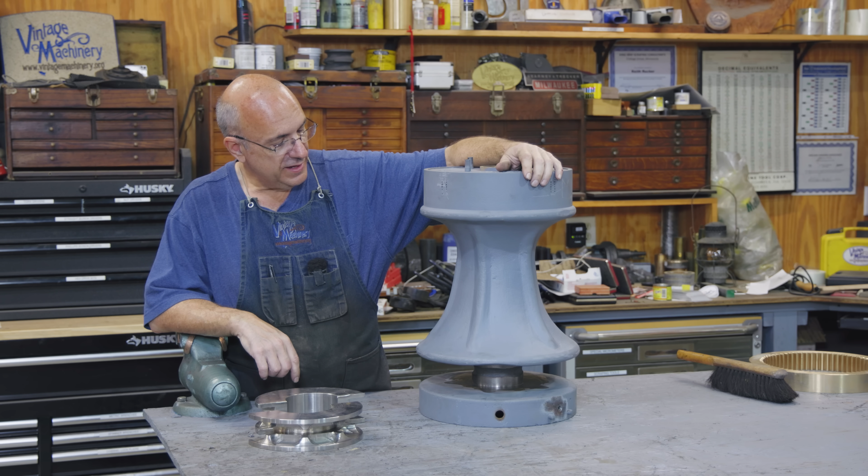Guys, today we're back to working on the Tally-Ho Capstan project, and we're going to be changing gears a little bit and starting to work on this windlass drum here. And particularly today, what I want to focus on is getting the chain Gypsy mounted in here. Now, if you haven't followed along with this project so far, this original windlass here is over 100 years old. Came off the Tally-Ho sailing ship that's being restored up in the Pacific Northwest right now. And this is the original capstan that was on the boat.

However, the chain Gypsy down here in the bottom, this chain Gypsy is basically the part that grabs the anchor chain and pulls it up out of the water. This drum will rotate and it will wrap around here. The original chain Gypsy, or the little sockets that the chain fits into, was cast into the base of this. It was extremely worn, as you would expect on a piece that was over 100 years old. And to make matters even worse, the pattern for the chain that was in here is not a chain size that you can even source anymore. So it really didn't fit any modern chain.

So we made the decision, working with an engineering firm up in the UK, to basically machine out the original Gypsy in here, and we're going to be installing a new Gypsy. Now, David Webster of Deep Blue Engineering, who's kind of done the engineering work on this, he's actually already designed the new Gypsy pieces. He's already machined these out of some stainless steel, and he's sent these over to me. And my job is, we got this machined out previously, and we're going to be mounting this today and getting it ready to put back together so that it can be used the way it needs to be used going forward.

So let's bring you in here, kind of show you the components, show you the game plan, and we're going to get started and get this job hopefully knocked out in this video, getting this chain Gypsy mounted back in here. So these are the new pieces here that were machined, and you can see the sockets cut in here for the chain. This was obviously done on a CNC system where you got the flat and then you got the groove in the back that the chain will lie in, the links in between them. And again, this is what we're going to be installing in here into this slot. And we had opened this up previously, machined out all that old area in there.

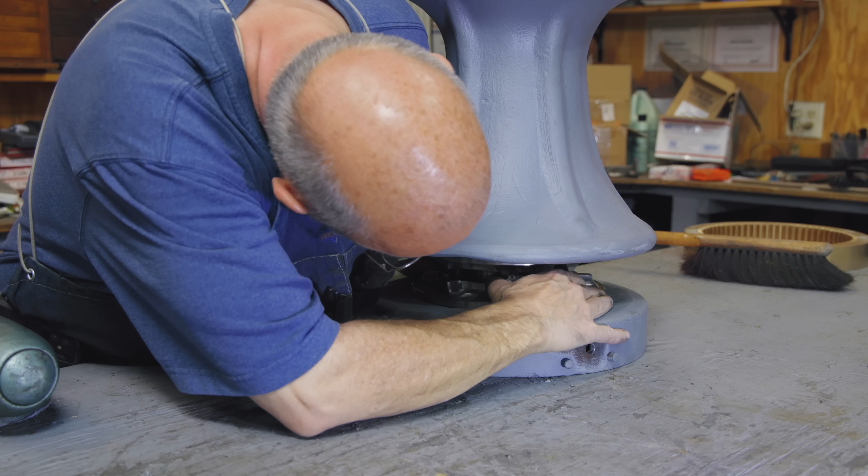And these basically are just going to slide up in here. Let's see, I gotta get them in here. They fit. Just gotta get them in just right. There we go. So those two halves come together in here, and these just sandwich right in place. They come together very nicely in a seam here that you can see right here, and I have to get them pulled up tight, but that seam will close. I had them closed up earlier.

I don't want to do it right now because it's got to come back out, but this will squeeze all together. And we're going to be putting some bolts up through here, basically bolting this thing into place. And it'll also have some bedding compound stuff put in here as well when we assemble it for good, so that we have a nice tight fit.

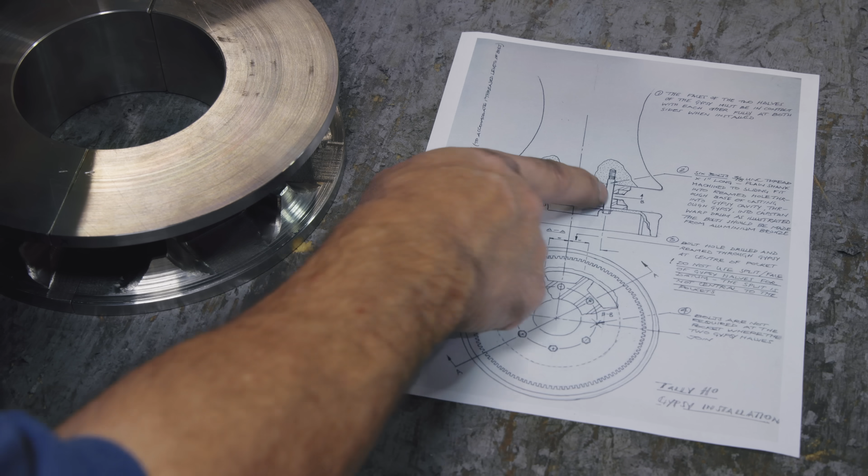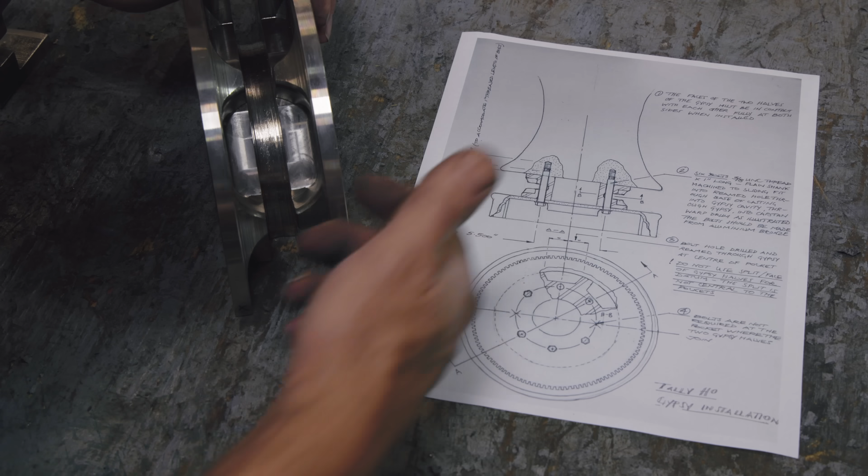So let's take a look at the drawing that Dave sent me. And you can kind of see we've got the capstan here, and here's the Gypsy halves that will be going into the capstan. We'll be running some bolts up through this. Basically, he wants to use 6 bolts. 1, 2, 3. We won't put bolts on the split line, so there'll be 3 bolts equally spaced, and those spacings are also going to be done so that basically the bolt will pass kind of right behind where this chain is going to be laying flat.

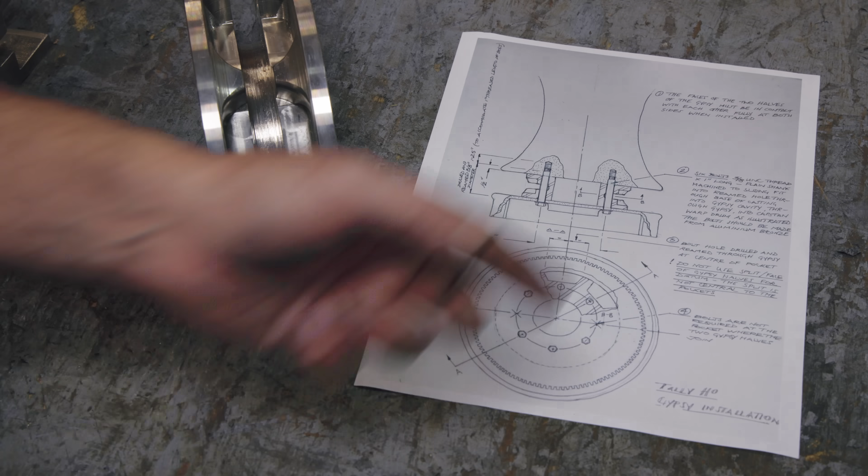So right in here, you got the chain, you got a cross section, but there's an area right in here where there's nothing in there for that chain to hit because it'll be laying flat here, and you'll have the 2 links on either side. So the bolt will be kind of coming right down through that area, and we'll just have those right in place. So these are going to be 3/8 bolts. We're probably going to have to make these bolts out of some aluminum bronze. That's the material he wants to use. Won't be corrosive. And we'll have to figure up the length and all that once we get these things drilled and tapped. So anyway, that's kind of the game plan. That's what we're going after.

I think my game plan is we're going to assemble the gypsy halves back over into the capstan, and then we're going to take this over to the radial drill and actually drill the holes in here. I'll have to get them lined up where they need to be. We'll drill the holes, and then we'll probably pull the halves back out.

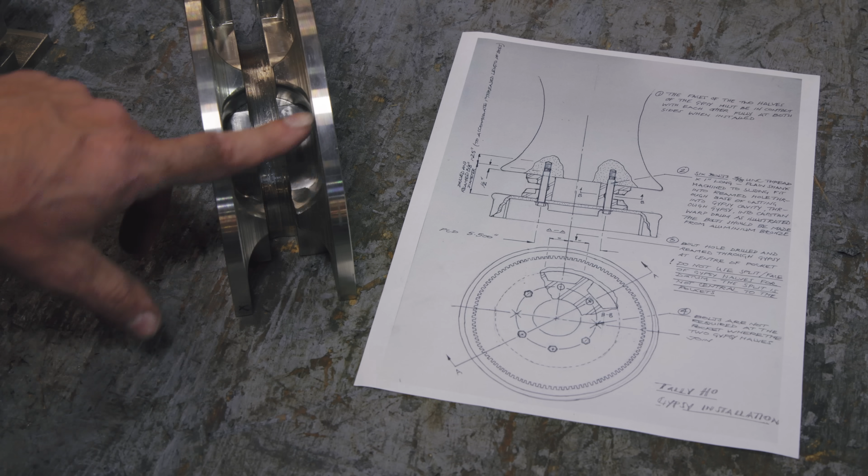We'll tap the holes. Since we'll be drilling for a tap size, then we'll have to drill these oversized to the 3/8 inch size, drill and ream those. For the bolt to go down through, we'll have to tap the holes in the bottom of the capstan, make the bolts, and put it all together. So yeah, a lot of work, but we'll get it done.

So I've got the capstan drum over here on the radial drill where we're going to be drilling the holes that are going to be going through the actual casting here, as well as through the gypsy piece that's going to fit up in here. And I need to get this set up for the diameter that I need to drill. Now, I'm not going to be able to do like on a milling machine and dial this thing in, find a center, and lay out a perfect hole pattern.

I do know what my diameter needs to be, and we're just going to be kind of getting those bolts more or less in the center where they need to be on each one of them, but they're probably not going to be laid out perfectly. It's going to be all right though. We just need to have the holes for alignment.

Now, to set up my hole pattern, I need to have the radius marked in here for me to work off of. So what I've done is back when we turned this, I had to make a little piece that fit into the bearing. It's just got a center in it that we used over on the lathe to support this. I've just dropped that back down in here, but what I got now is a center that I can work off of, and we can scribe a circle in here for us to be able to lay out our hole pattern.

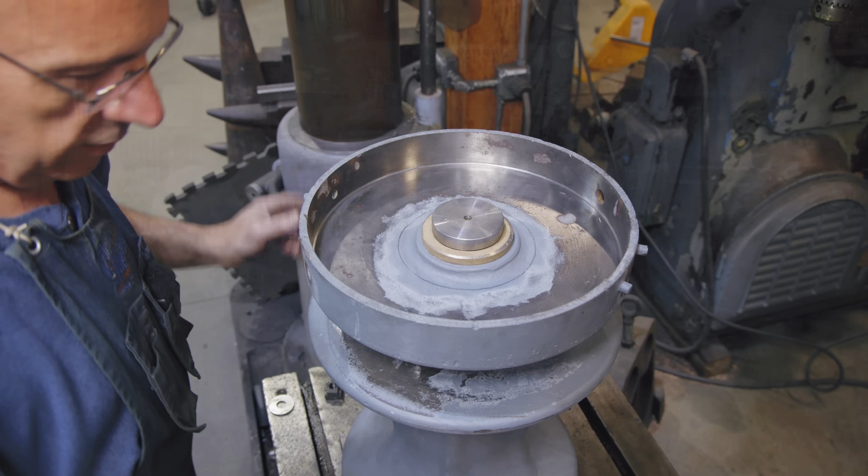So I've got my hole in here. According to the plans, it's a 5.5 inch diameter circle. So I basically just took a set of trammel points here. One of them I can mount a pencil in, and I just dropped this down into that center, and I went around and scribed a circle all the way around. That is my circle, where we'll have everything in that circle.

Now what I need to do is get the gypsy piece put back in here and determine where each of the individual holes need to be. And we'll start drilling this thing out. But before we do that, I need to get this whole thing bolted down to the table. Now I've got a long rod that I'm just going to drop down the center here. We'll come up with something to kind of clamp this thing straight down to the table so it doesn't move while we're doing all this. I get that set up, and we'll see if we can start drilling some holes here very soon.

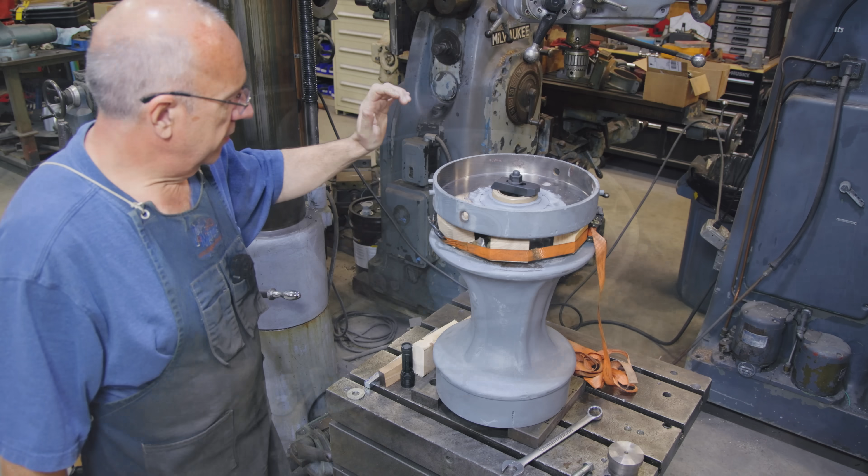So just showing my setup here, I think I got it ready to start drilling. So first off, we've got this whole capstan drum attached to the table. There's one single bolt that goes all the way down through here. I just used my clamp set, and we put together a bunch of these different studs, and it's just all sandwiching straight down. Now there's a couple of studs sticking out of the bottom of the capstan here, or it's actually the top, it's turned upside down, but still it wouldn't allow me to go flat down the table. So I do have a couple of blocks of metal down here that's just kind of holding it up. It's all nice and flat and even.

And then on the gypsy piece inside, I wanted to make sure that was pulled together real tight. So I just put some blocks of wood around this and used a ratchet strap, and that's just holding it all nice and tight in there so that we can come in here and drill. Now, we'd already scribed our circle up here. I went back and lined up where the 6 holes need to be drilled. I have those marked in here. You'll see that in a minute. And now I think we're ready to go ahead and start drilling these. Let's go at it. Let's see if we can drill some holes.

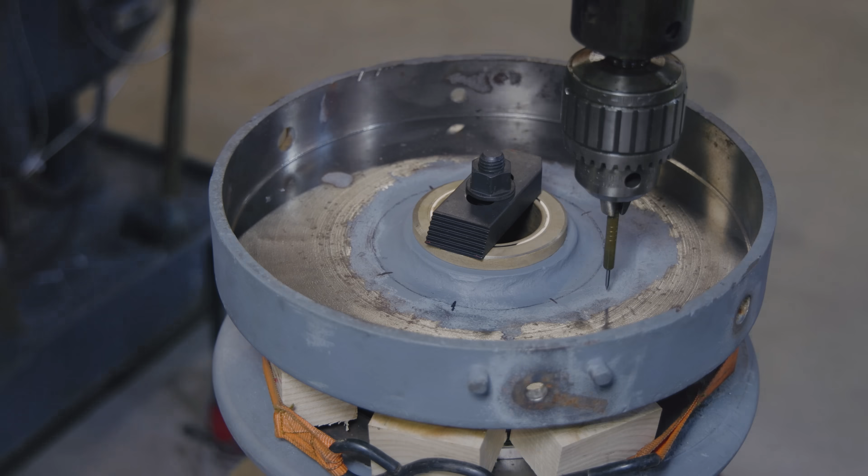All right, so first thing I need to do here is we need to get lined up on our holes to drill. So with this radial drill, I can kind of move the head around, swing it around, move it in and out. And I've just got a little pointer on here, and I'm basically just trying to get lined up over that mark. And guys, this doesn't have to be just perfect.

We're going to drill these holes, get them as close to that hole pattern as we can. But if it's off by just a tiny bit one way or the other, it's not going to matter. We're going to be putting this back together so the holes will line up when we come back together. We're going to have them awful close. So that one is where it needs to be.

So I'm going to go ahead and just take my little pointer out. We're going to start with a spotting drill, and we will just spot that hole to get a little hole started right where it needs to be. We're running on a rough cast surface here, so it's not a perfectly flat surface to start on. We will just get us a little hole started. All right, that should be good.

Now we're going to be using 3/8 inch bolts. We're going to be making some bronze bolts to go down through here. So it's going to be threaded 3/8 down in the bottom of the hole. So I'm basically going to start by just drilling a hole all the way through here for a tap size for 3/8-16.

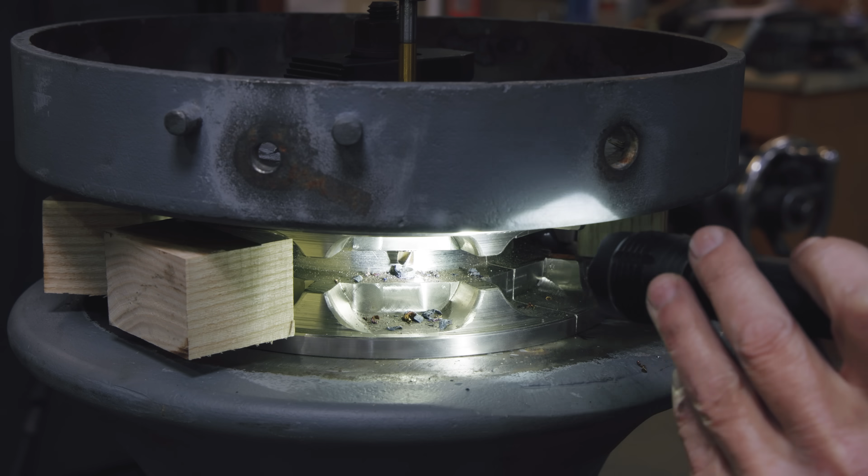So it looks like, guys, what happened is when that drill bit came through that little open area there, a little slug got down up underneath it, and that little slug just turned red hot. It was between there and the metal. I'm going to see if I can take a punch and just kind of punch that out and see if we continue drilling. The drill bit doesn't look that bad, but that was just in the way. Sorry, I turned the light off there.

This little slug here was what was in between the drill bit and the bottom that we were drilling into. That got red hot. Hopefully we haven't messed up too bad here. I think I'm going to take that drill bit back to my drill bit sharpener and make sure we got a good edge on it, and then we're going to come back and see if we can drill that the rest of the way through.

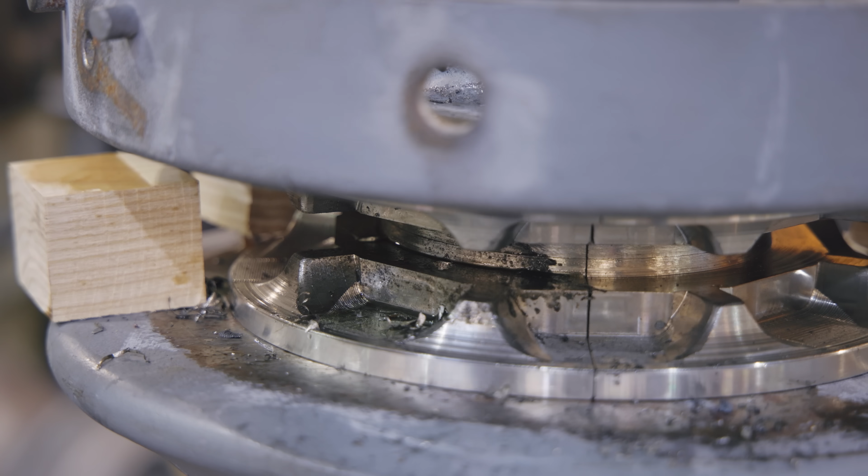Hi guys, I took that drill bit and sharpened it up, and I've been working on this a little bit. I've been putting a little oil in there, and I'm just kind of putting the power feed on and letting it drill a little bit. Then I'm pulling it out of the cut, trying to keep it from getting too hot again. So far, we seem like we're getting down on there.

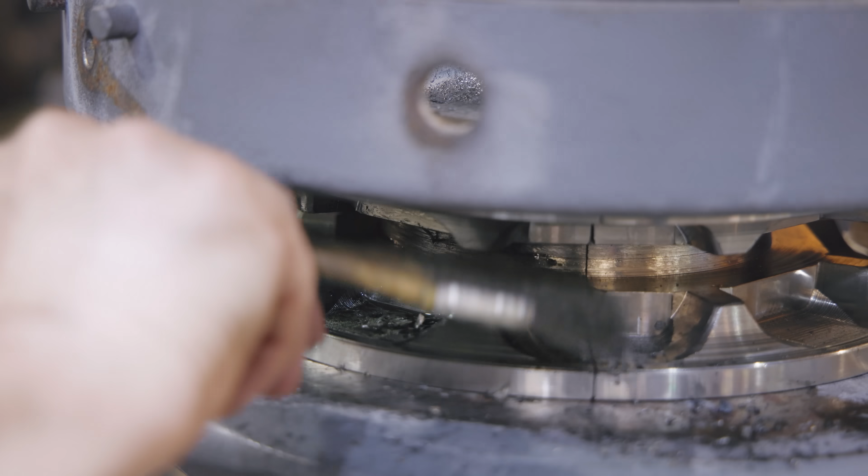Taking a second for this drill. Here it goes. It's starting to drill now, and it's pulling chips out. But you can tell this is really struggling. So I'm just kind of pecking it a little bit, clearing these chips, not giving it a chance to get too hot. It was a little bit of a bear to get past. We got some work hardening on there where it got hot, but I think we're getting through it. So we're just going to continue pecking on this.

I hope they're not all this much trouble. I know that stainless steel can be tough to work with, but this is getting kind of scary thinking it's going to give me this much trouble all the way through. Hopefully we get this first hole through here.

I'm going to try something a little different. I'm going to put some Anchor Lube in here. This is stuff I normally use for tapping, but I've always heard it's good as just a general cutting fluid, and I've also heard that it's really good on stainless steel. So heck, it ain't gonna hurt to try. We'll give it a shot and see how it does.

Yeah, we're into cast iron now, and we're all the way through. Good deal. All right. Wow. That was a tough hole. We got it. All right, let's figure out what I want to do before I go to the next one.

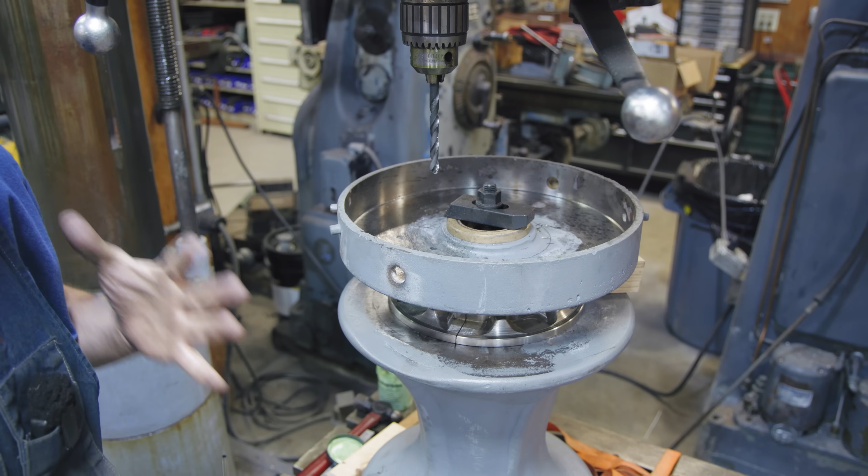But I do want to go ahead and enlarge the top part because I want to drop some bolts in these as I'm drilling them, just to make sure that nothing moves, just kind of pinning it in place as we go. So I'm going to go ahead and do that real quick. I just got a 3/8 inch drill bit in here, and tell you what, we'll just go ahead and put a little bit of this Anchorlube on here.

Shouldn't have any problem drilling through the cast iron on the top there, but once we get below that into the stainless, you see it's not drilling really nice right there. I really think that we work hardened the bottom of that. Hopefully we're not going to run into this kind of problem throughout the rest of this part. Clear out my chips, put a little bit more Anchorlube down in there since we are down in the stainless now.

All right, we're through the top part. I'm not going to go all the way through the bottom, but I do want to at least kind of get it started. All right. I think that's good for right now.

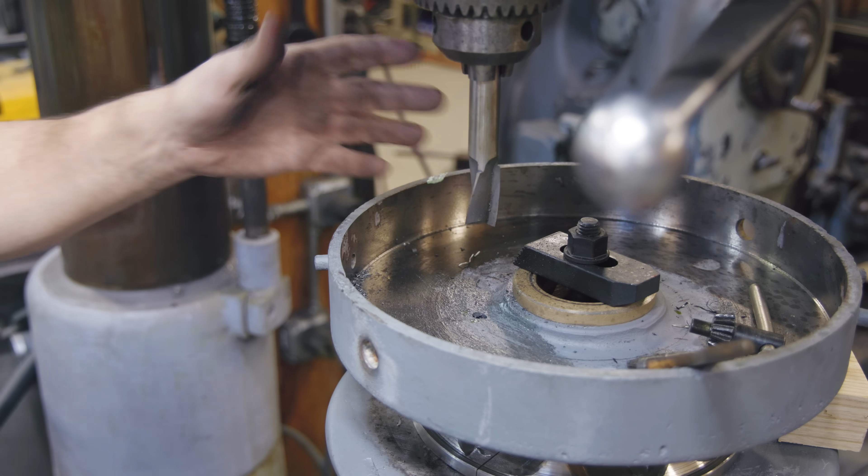All right, now I've got a counterbore in here. I don't have a pilot for this, but what I want to do is enlarge a flat. I want to basically just put a flat down here where the head of that bolt and washer is going to go. Right now I've got an uneven cast surface. I really want to have a flat surface, so I'm just trying to get an area that's flat where everything will go. And I'm hoping I can do this without having a pilot on this tool. If not, we'll have to make a pilot for it, but let's see how it goes.

We're just basically spot facing that area there until we get a nice flat surface all the way around. See what that looks like. It's probably good enough, but I see one little area it's not quite. That's probably good right there, yeah. All right, that just gives me a flat surface for that bolt to tighten down onto, and that washer should fit right down in that socket. All right.

And now what I want to do is I'm just going to take a bolt and I'm just going to let it just sit down in there. It's not tightened anything, but right now all this is doing is just serving as a pin. And as we drill the rest of these holes, that's going to just make sure my alignment hopefully stays exactly correct and nothing moves around on me.

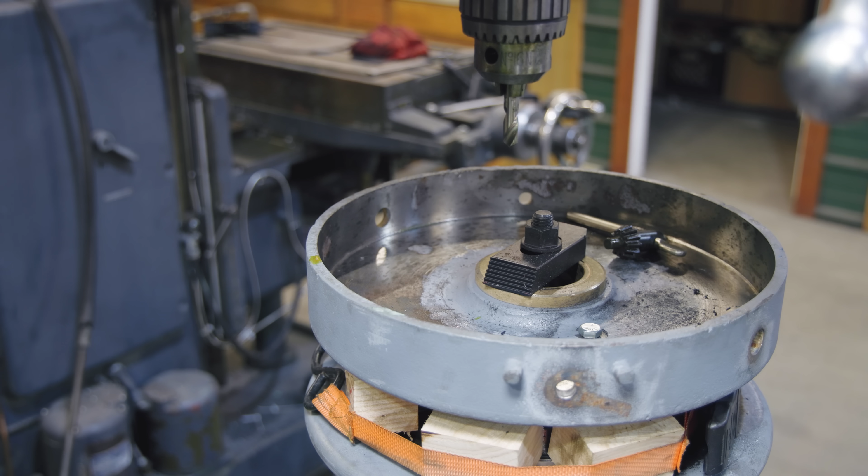All right, here we go with hole number 2. I should have it lined up right over my point again. We'll come in here with the center drill, or the spot drill rather, and we'll just spot a hole to get started on. We'll go to a 5/16 inch drill, again the tap size, and we'll drill through that cast iron piece first.

I'm going at a slower RPM, hopefully not building up as much heat this time as I did last time. According to my charts, I should have been able to run this bit, even in this material, at about 750 RPMs, but we got way too hot. So I'm hoping that by slowing this down, we're running at about 200 RPMs right now. Just taking our time a little bit more.

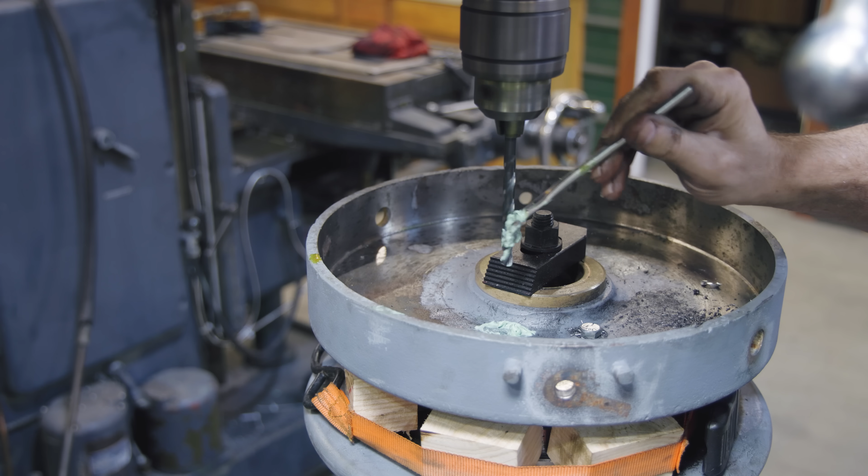All right, we are through the cast iron and into the stainless now. And I'm going to put a little dab of Anchorlube in here and see if that helps. I'm feeding by hand now rather than using the auto feed. And I'm just going to take my time. I'm going to kind of peck it a little bit, clear chips, and take my time going through this.

So far, this seems to be going a lot better, but last time the trouble started once we kind of went through that center section and started in the bottom half. We should be getting close to popping out. I think we just came through the hole. Yep. So we're through the center section now. Let's see if we have better luck down on the bottom half now.

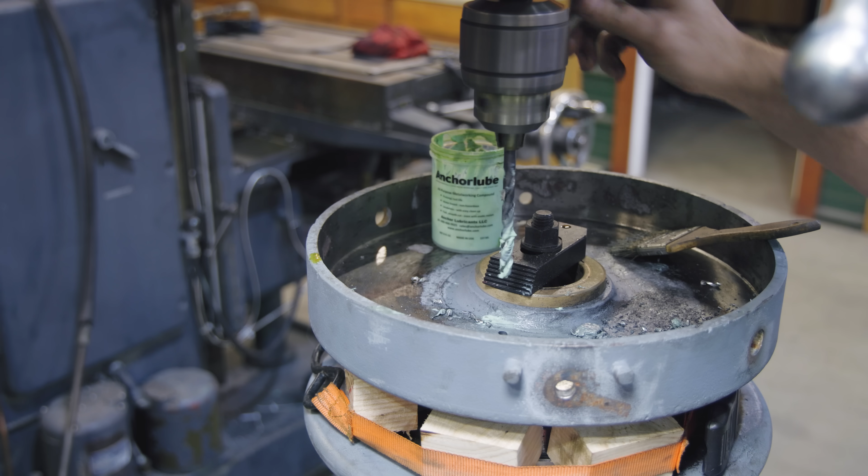Kind of feels like it may be in the cast iron now. I'm about gone as deep as I can go with this drill bit. I'm going to be bottoming out here. But I do have a longer drill bit we can put in there. All right, I'm going to swap out bits. All right, we are through, I think. Yep. All right, that was more like what I was expecting.

So now we're gonna go ahead and oversize drill this at least part way so we can get another bolt in there. We'll spot face the top, go around, do the other ones, and hopefully the other ones won't give us any more trouble.

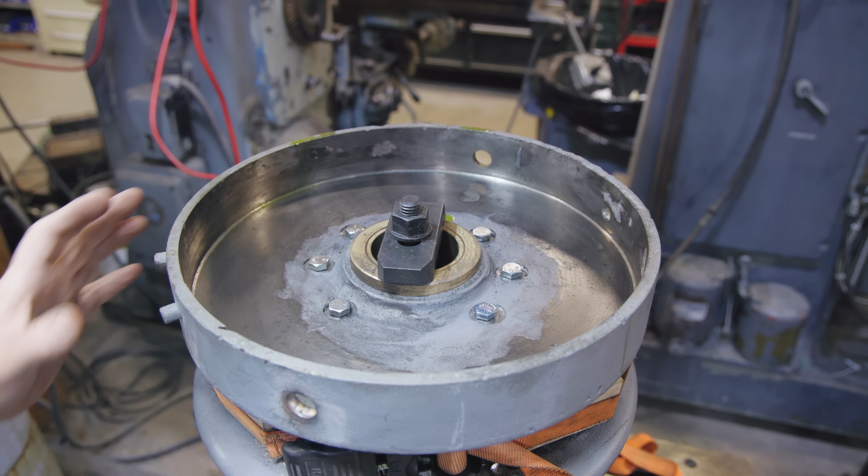Well, I got all my holes drilled. Everything went just fine on the rest of these. Just took my time and a little bit slower speed there on the drill, and we didn't have any more troubles. Did have to sharpen my bit a couple of times. That stainless steel was just really, really tough, but I really think that Anchorlube helped out a bunch, getting a little bit of lubrication in there as well. So we've got the whole pattern all drilled out.

I do want to go ahead now and take my straps off. And next, what I need to do is I need to actually take this thing completely back apart again. I need to finish drilling out the holes in the stainless parts all the way through, and we need to tap the holes in the bottom of the capstan for the screws to go into. But we got some other work that we need to do before we can put it all together. But we need to go ahead and see if we can get it all back apart.

So we'll start by pulling out these little bolts. Like I said, I just put these in just as pins, really, to kind of just hold it all in place as I was finishing up the drilling and stuff. That one wants to be stubborn.

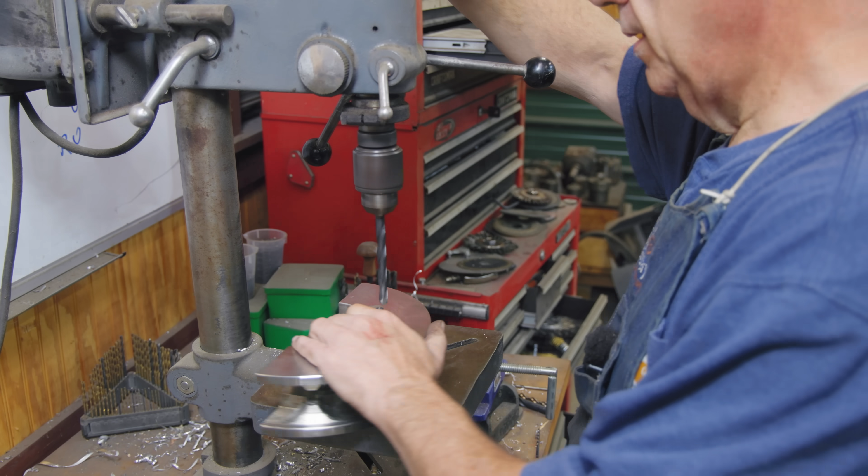Over at the drill press, and we're just going to finish drilling these holes out 3/8 all the way through. This will be for the bolt to pass all the way through the part. So we'll just go around to each one of these holes and finish it out. I've already drilled partially through with it, but we didn't go all the way through because I didn't want to get down into the area where the tap is going to be running below.

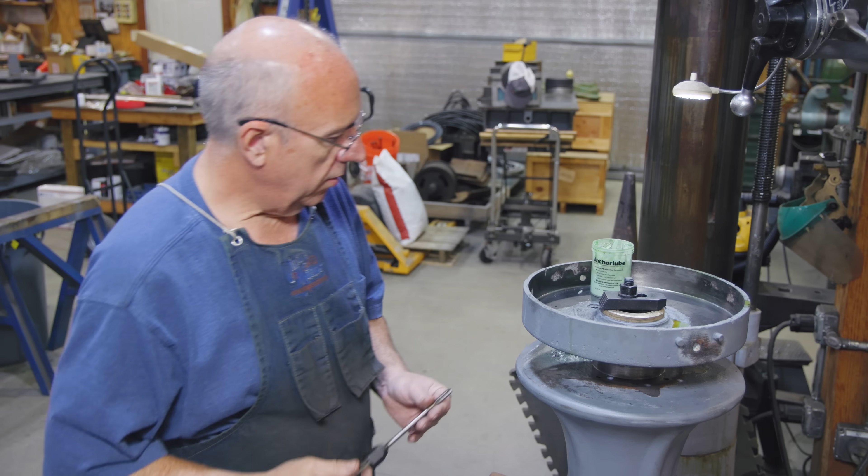Well, I think we're ready now to go ahead and tap the holes down here in the bottom. So the top has been drilled out to 3/8, but we've got the tap size down at the bottom. And I'm using a pulley tap. This is called a pulley tap because it's a long tap. It was often used on pulleys where they needed to go through the outside rim of the pulley down to the hub. So it's basically just an extended tap, and we should be able to kind of reach down in that hole. So I'll put a little dab of that Anchorlube on here.

Even though that is 3/8, I'm going to have to kind of thread it through the top. We're going to go back and ream these holes once we do the final assembly to make sure everything lines up just right. But I'm going to have to kind of get it through there and down into the, it's not really barely even cutting, but we are going to have to kind of screw it down through that top section. And once we do, we'll get down into the bottom. This should drop down here in just a second.

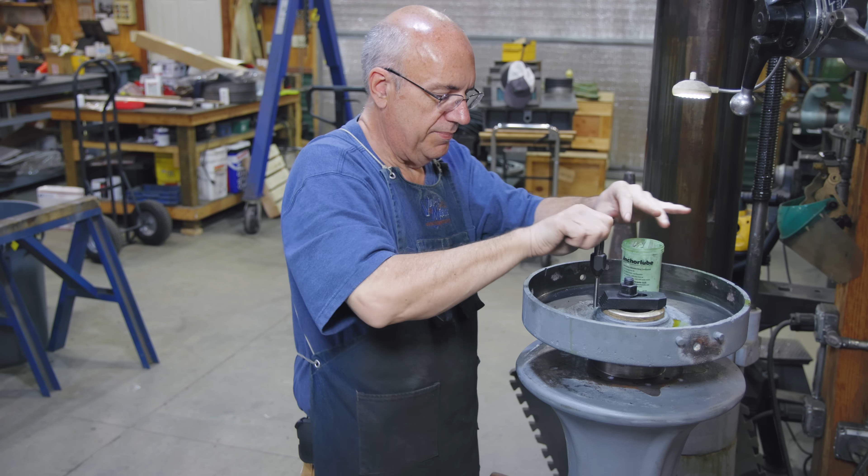And now I can tap that bottom hole. And again, we're going into the hole size for this tap, which was 5/16, I think. Anyway, we're going to do all of these, get all these holes tapped, and go from there. So get all these done and come back.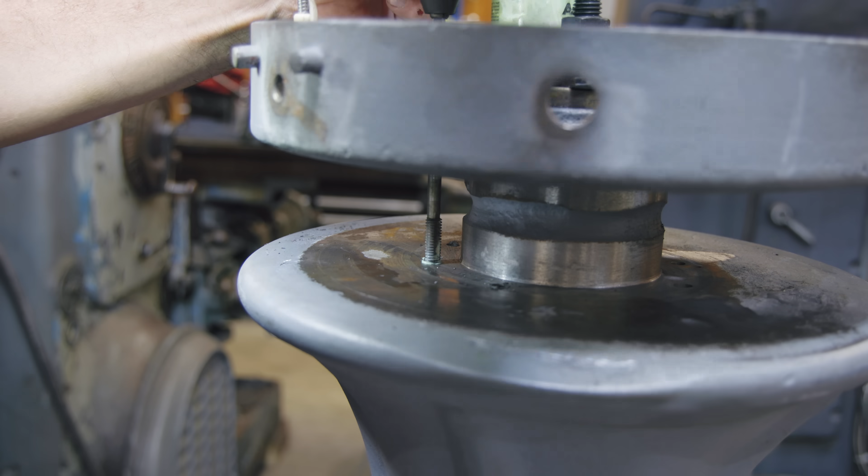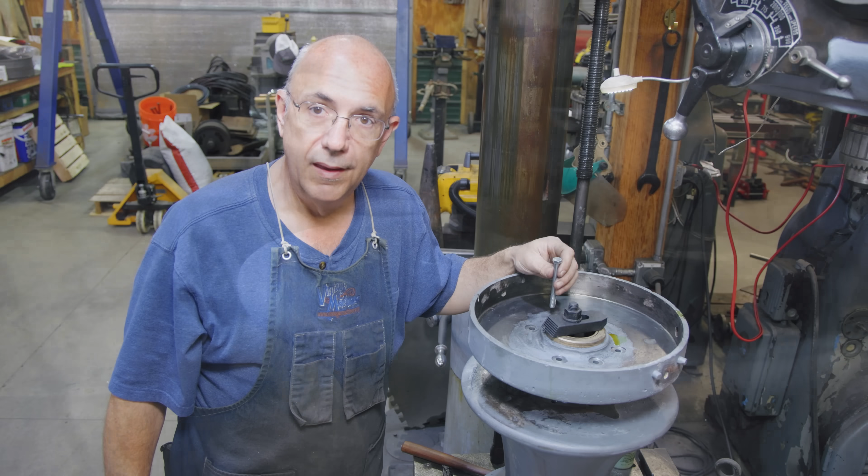So we're making good progress on this. I got my holes all done. We're ready to basically bolt this thing together. But before we do, I got to make some proper bolts. I've got just a regular steel bolt here, but the design that we have actually calls for the bolts to be made from aluminum bronze. And I was not able to source any aluminum bronze bolts in the size that I needed.

I was able to find some that were fully threaded, but I really want some that have a shoulder on them like this so that they can be a little bit tighter in there, and we can put some Loctite in it to hold it all in place according to the design that Dave's worked out. So instead of purchasing some bolts and doing it the easy way, we're going to do it the hard way. I've got some bronze material over there, and we're going to go over to the lathe. I got to make the bolts for this thing.

Once that is done, I need to come back in here also. We need to give this thing a really thorough cleaning, and I need to check out the specs on the Loctite material that we're going to be using in here. I'm thinking that I'm going to have to actually have a little bit of a texture to the surface. The first material we were looking at called for like a sandblasted surface. I need to double check. We did change the bedding compound that we were going to use. We went to a different product. I need to check that. But if it needs to be blasted, I need to take this back there to my bead blaster and actually sandblast it, clean it real good, put the bedding compound in here and come bolt all this together.